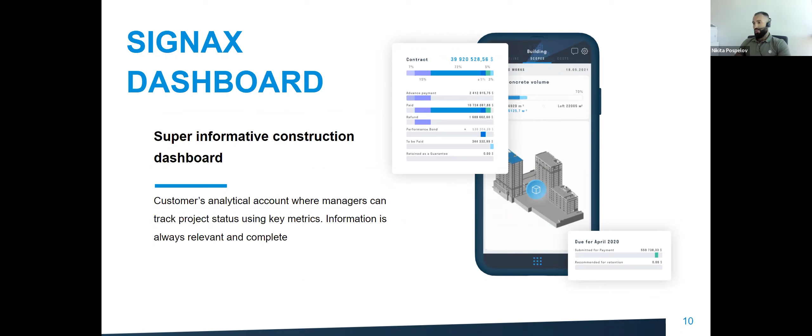This is a web-based reporting tool from on-site. This is a very informative construction dashboard for management level, engineers, and any stakeholders involved in the construction process. You can see actual, updated information about the project process, open any BIM models regarding the design stage or construction stage, and check all the numbers and metrics.

Anytime you can select one of the types of cards inside the report dashboard and, for example, compare planned and actual BIM models. You can see the percentage, the scope, and the schedule.

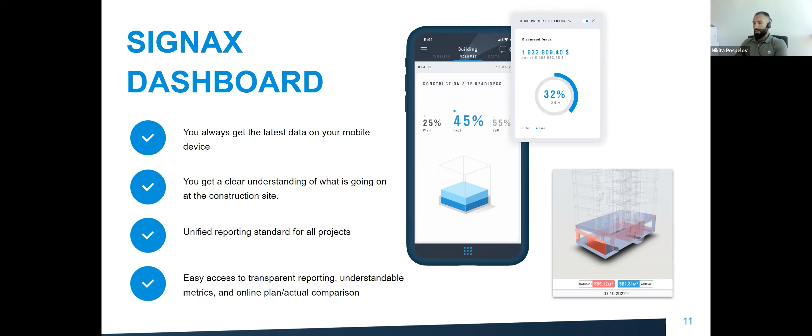The second module is inspection. This is a 360-degree service for images. You can open it using a web browser and see what was happening on a certain date on the construction site. You open a plan, select a point of interest on the plan, the image will upload, and you'll see what was happening on site.

One of the useful features, you can compare two photos and see the progress, the dynamics on site.

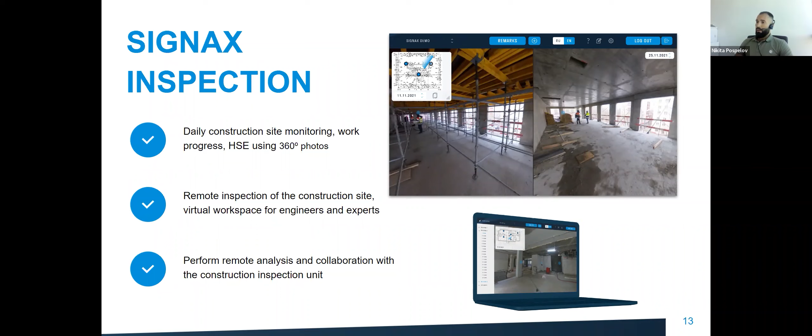We also developed our own application for 360-degree capturing. You can download it from Google Play or App Store. This is a very convenient way of capturing 360-degree photos using your mobile phone—just press one button and send all the photos to SIGNAX Inspection. Then all stakeholders will see updated photos in 360-degree mode inside a web browser.

One of the main features is automated design, BIM model elements classification, BIM model audit, and exporting tender scopes and bill of quantities, using just the BIM model in 2 steps.

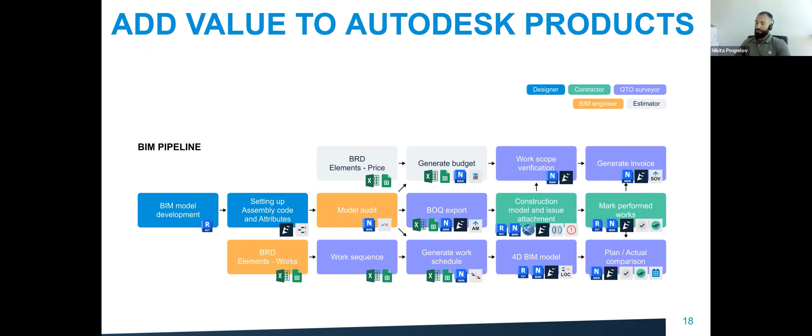So let me jump to the practical part. That was just the theoretical part and some images about the SIGNAX product. Let us jump to the SIGNAX dashboard report. Here you can see an example of developed reports inside SIGNAX. So you can create reports depending on the dates. You can create them on a daily, weekly, or monthly basis. It depends on the project rates, how fast work is implemented on site. So usually contractors create reports on a weekly basis.

This report is created with logical division by horizontal rows. The first horizontal row is project general info. We have lots of predefined cards inside our dashboard, so you can customize your reports on your demands. The first slide is just an album. You can open it and see the actual photos of the project. The next slide is main tech indices about the project, common area, height of the building, number of parking lots, number of apartments, etc.

The third one is the implementation period regarding the contract or agreements. 360-degree images, we'll see them later in SIGNAX inspection. Online CCTV cameras from on-site, so you can jump inside and see what is happening online on-site. Sorry for that. If the internet is slow in the field, you can anytime select low quality video and see what's happening on site in the field. Something like this.

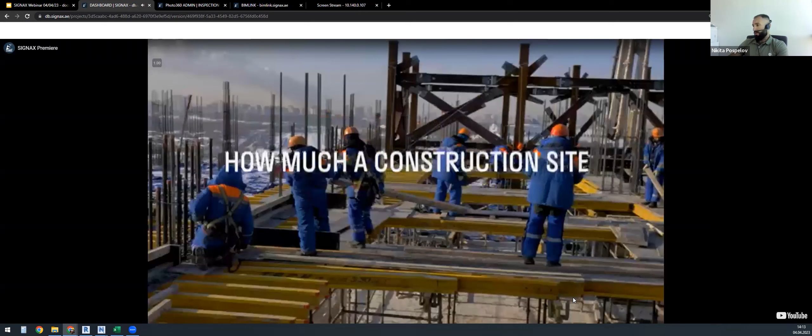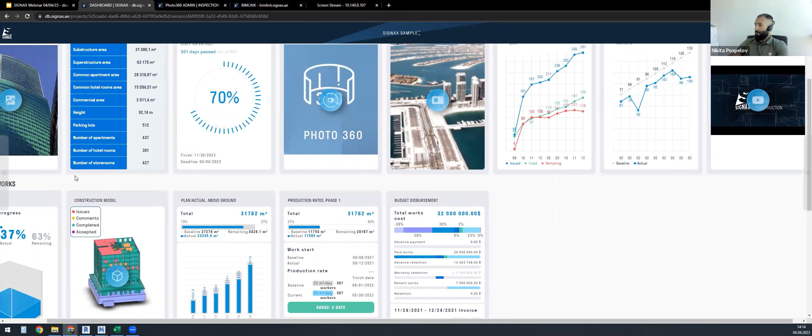So the next slide is workers trend. Workforce on site, how many personnel was planned, like a baseline, and how many actual personnel was on site on each date. Also, we have implemented YouTube clips. You can open them inside the SIGNAX dashboard. So usually you can add some commercial or, for example, an aerial drone overflight of the project and provide it for a customer or a client.

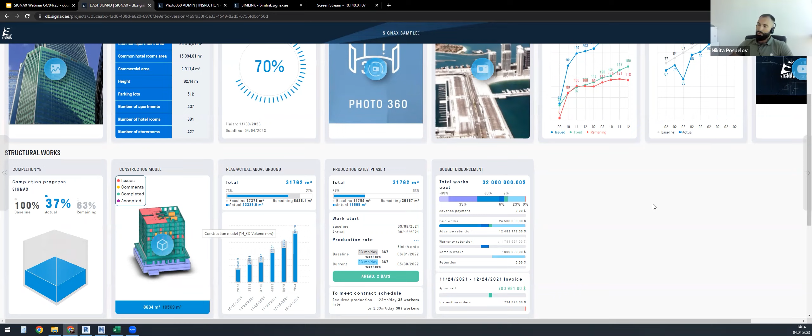So the next horizontal row is created regarding the structural works. You can see the overall percentage of work implemented and how many works remain. You can use SIGNAX tools and develop the construction model to provide the exact scope of works implemented on site. In minutes, I'll tell you about other cards in the dashboard regarding structural works. So plan actual information about the works that were planned, the gray line, and the blue line regarding the actual works. So anytime you can see the total works planned on site, the baseline, and the remaining works. You can jump inside and see the graph view, and you can change the view to another graph.

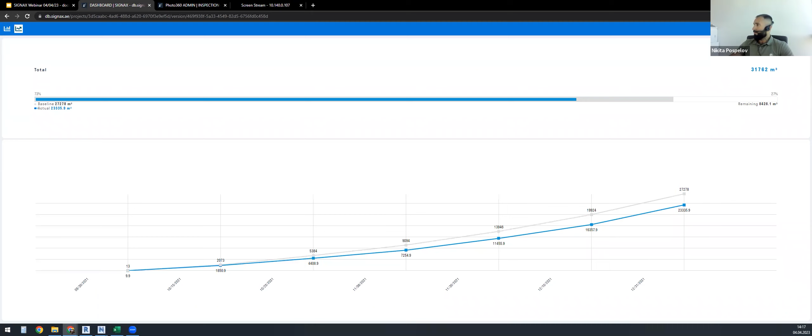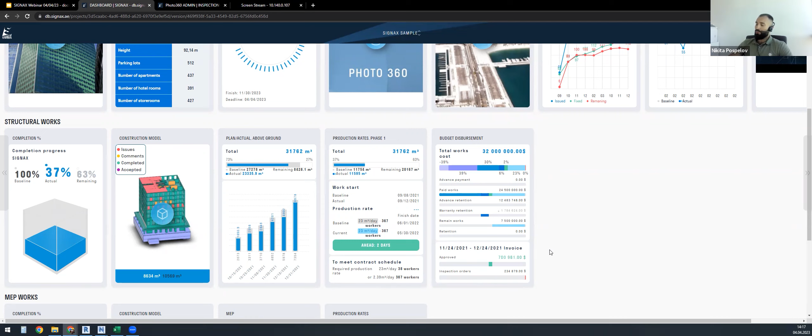Production rates, how much production rate was on a certain date, how many workers were involved in this type of work, and how many workers need to be on site to meet the contract schedule. Of course, we have some information inside the budget card, so you can see the overall budget, how many works were paid, and information about the current month's invoices that the contractor sent us for acceptance.

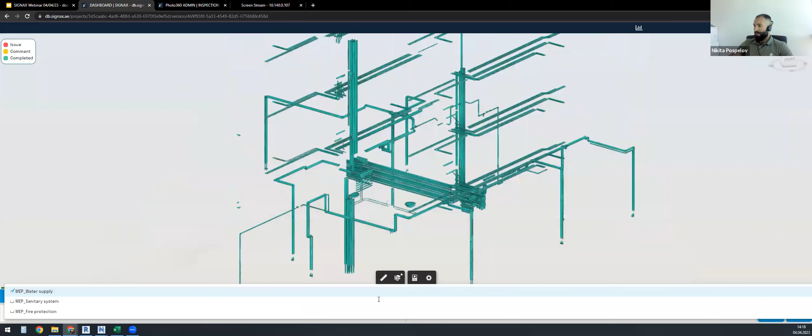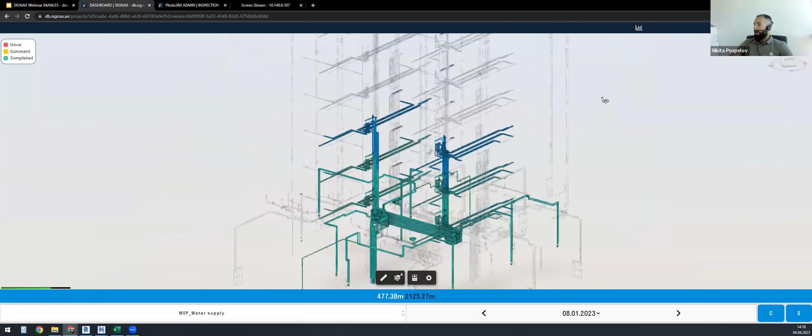And the third horizontal row is regarding the MEP works. Here you can see the construction BIM model that is developed based on the design model. So we can select, for example, the water supply system. See the blue elements selected. That's the volume that was implemented on site on the 8th of January. We can go back and see the exact scope on any date that was tracked using SIGNAX tools on site. In the 3D view, we can jump to graph view and track any of these dates and see the specific elements that were implemented on site, the overall scope and the scope of the specific date. And the same for the other types of works.

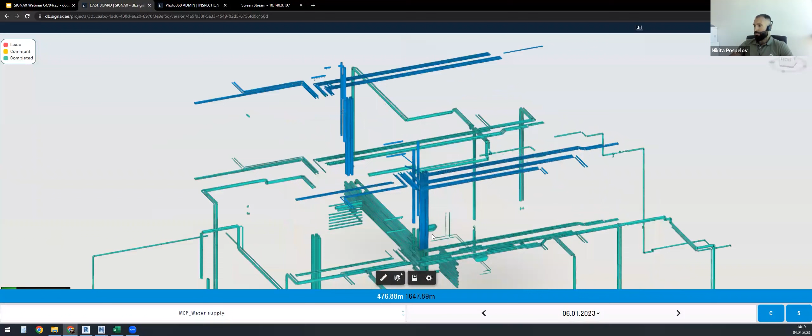As well, we implemented the feature for issue linking. So you can select any element and see what was wrong with this element. For example, here we can see the wrong pipe size. We can press this button and we will jump inside the ACC Docs system, CDE system, common data environment, and see the detailed information about the issue that was created inside the system. Same for other elements. For example, here we can see check for the leaks.

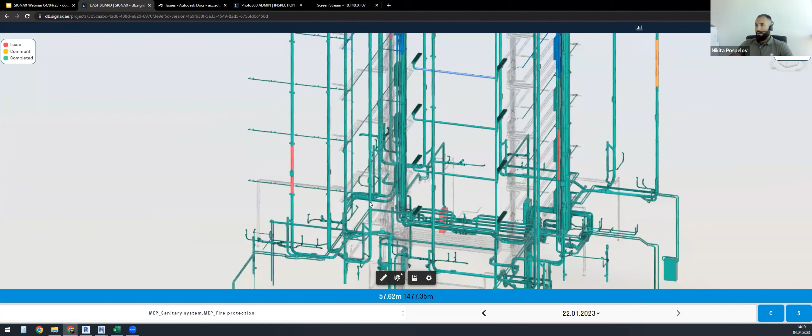Let us go back to structural works construction model. So the same, I'm selecting work type and see what was happening on a certain date with the scope on the certain date. As well, we can jump inside the graph view. And for example, we have some suspicious peaks here. We can select this date and go back to 3D view and see what elements were implemented on site and what's the accurate scope of these elements.

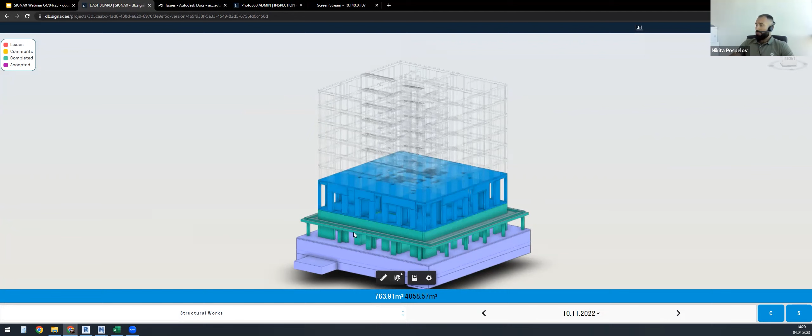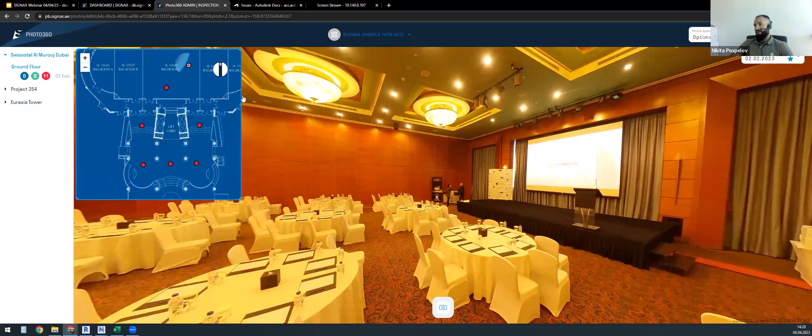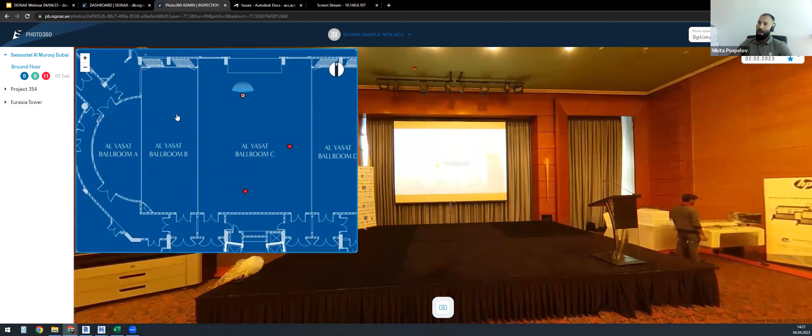So this is SIGNAX dashboard report, construction models tracked during the construction phase, and online CCTV cameras and images from on-site. So let us go next to the second module, SIGNAX inspection, 360-degree images from on-site. So here you can see one of the projects. We upload plans regarding each project, create points of interest, and the personnel who is responsible for creating on-site pictures, just using Photo360 application for iOS or Android, are creating photos on site.

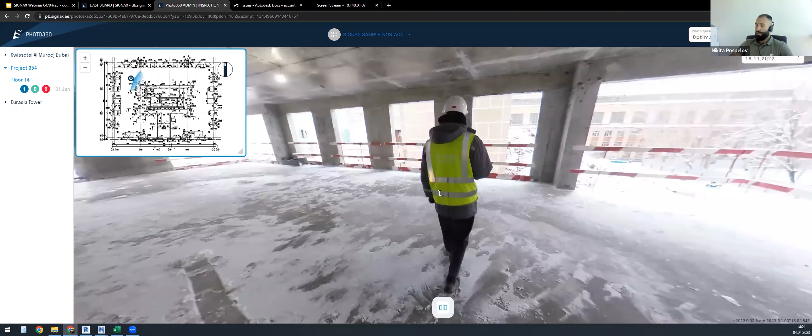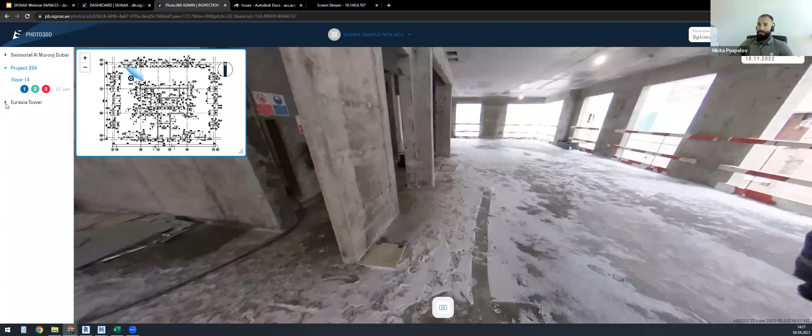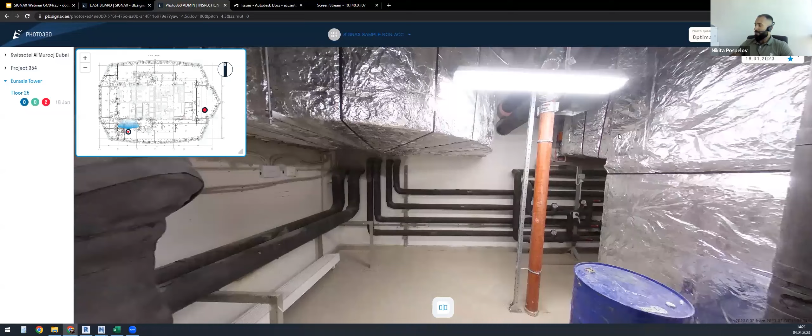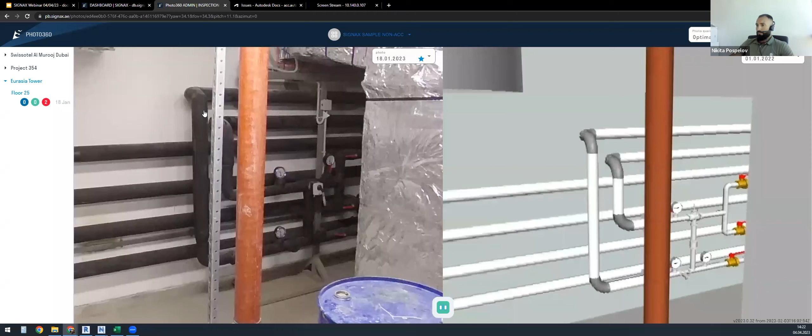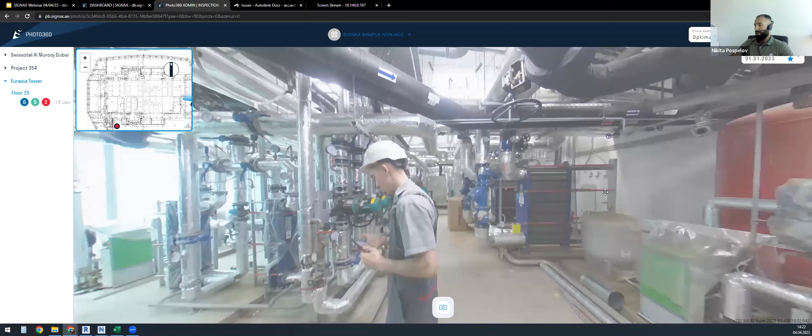So let's go next to the second point and compare it with the design stage. Right now, we're developing more features for this module, SIGNAX inspection. So you can add any comments, issues, and track the progress and collaborate with other stakeholders.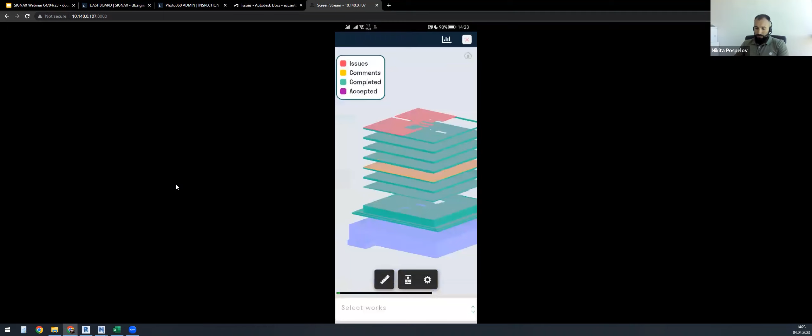Let me show you how it looks from the mobile device. So regarding the dashboard application, you will see all the same cards. See the information inside your pocket. The same, you can open the BIM model inside your smartphone, select the works, and see the exact scope of the elements that were implemented on site.

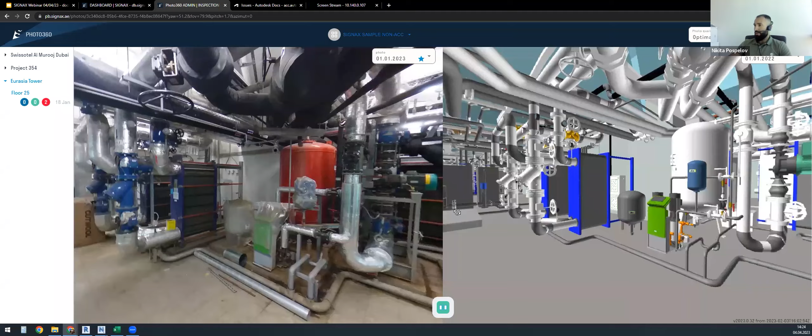Let us go next to the third and last module, SIGNAX tools. I'll tell you briefly how you can work with BIM models using SIGNAX tools. Right now, I'm showing the structural model of the design stage. One of the good and useful features is SIGNAX Checker. So you can provide the audit of the BIM model that we received from the designer. For example, we want to check if the assembly code is inside each element of the BIM model.

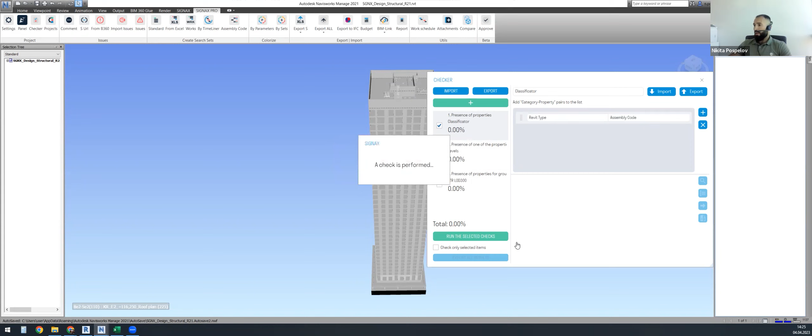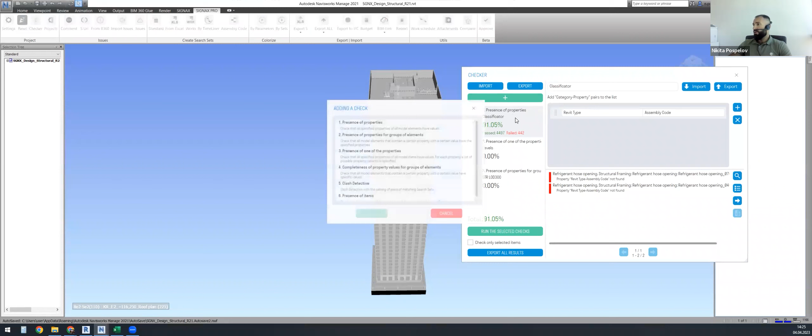So I'm specifying the name of the property, then click the button Run Selected Checks, and SIGNAX tools will check all the elements inside the BIM model, and we'll get the result which elements passed the check and which of them failed. So we have lots of predefined checks, so you can customize your checks and audits based on the design model for presence of properties, group of elements, presence of one of the properties, clash detective, and presence of items.

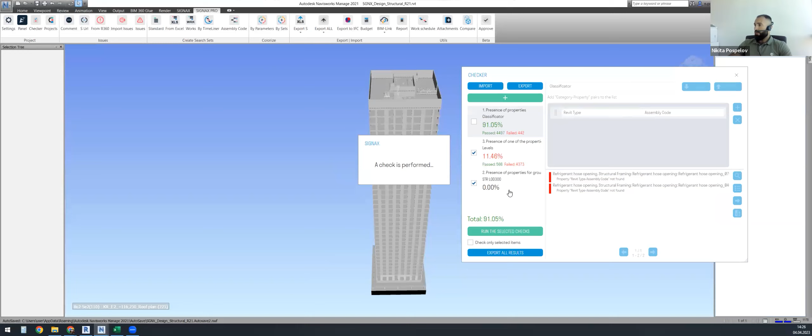So if you're interested in our SIGNAX checker, you can contact any of us, and we will tell you in detail how it works. The same, you can run two other checks, presence of one of the properties inside the BIM model, and see the status of the design model. Anytime we can export this information to an Excel document and send this check to the designer, or for example to a consultant. So this is one of the features that you can use on the design stage.

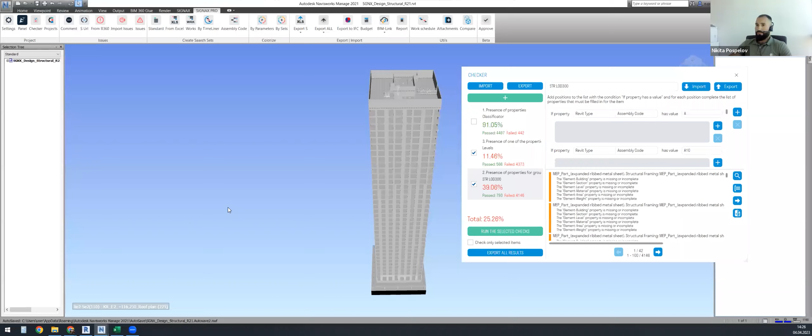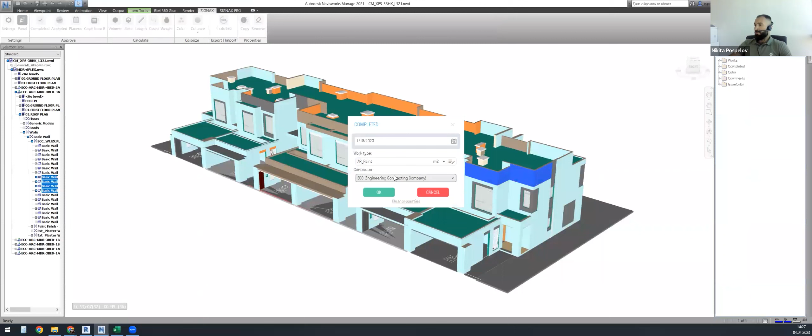Let me go to the construction stage using Navisworks. So when we track progress on site, we are using SIGNAX tools and Navisworks. It's pretty easy to do. You can select one of the elements and say that they are completed or accepted. Press this button, select the date of implementation on site, select the work type, for example, paint, select the contractor name. Okay, that's it. That's all of the process of tracking the progress on site. All information is saved inside the search sets.

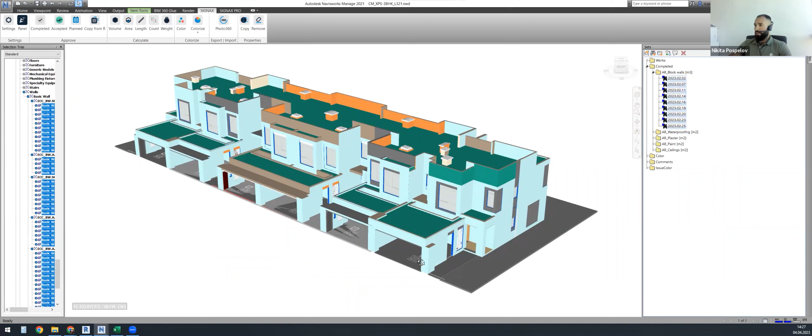So here you can see on the right side the dates that certain elements were implemented. For example, we are interested in what was the scope in February. I'm selecting all of these dates and hiding all other elements. Here we can see only the specific elements I just selected. And just in 2 clicks, we can get the volume of these elements, 261 cubic meters, and the area, 1700 square meters.

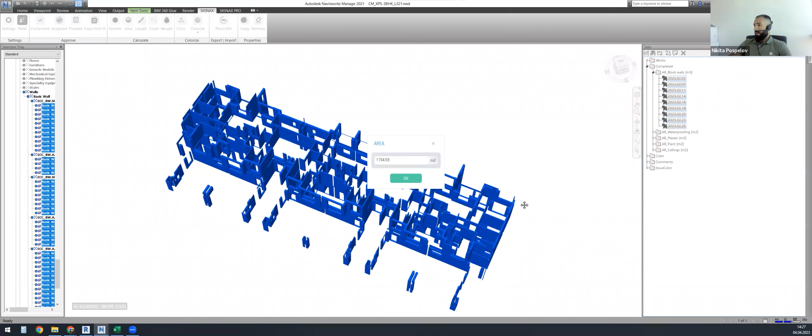And if we would like to export this information like an invoice, we can export this data regarding any type of work. For example, I'll press export. Sorry, this. Yep. Export invoice. Completed works. Selecting the project. Selecting work types. For example, I'm interested in all of them: ceiling, block walls, plaster, paint, waterproofing. Selecting the start date and the finish date. Okay.

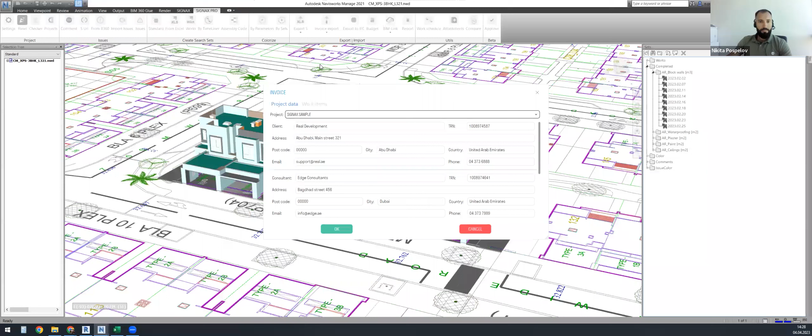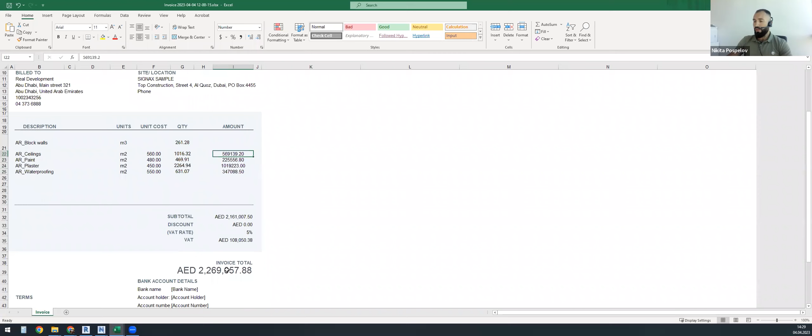So the invoice. So right here, I've just exported the invoice. Here you can see the quantity from the BIM model, unit cost that we specified inside SIGNAX tools, and the overall amount and the sum. So this is the complete document you can provide for a consultant for acceptance.

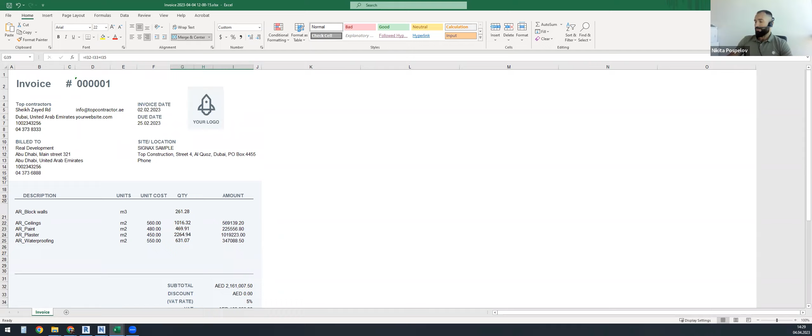So this is one of the features you can use on the construction stage. Let me tell one of the good features, BIM-Link. So this is used for providing information using the BIM model for the stakeholders that do not have additional software, for example, Navisworks, Revit, AutoCAD, etc. So you can press BIM-Link feature, select the works you can share with the stakeholder, for example, planned works or completed works, and upload it to the cloud.

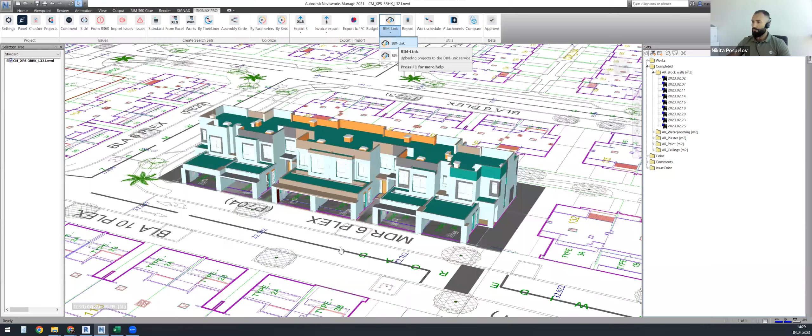So after that, we will have the direct link. So you can share this link with the stakeholders. Let me open it. 1 second. Copy link.

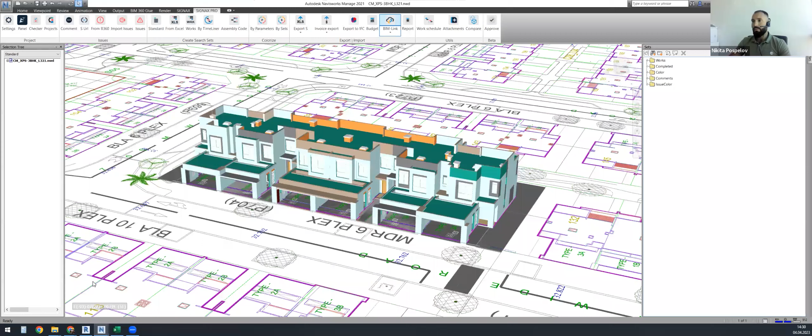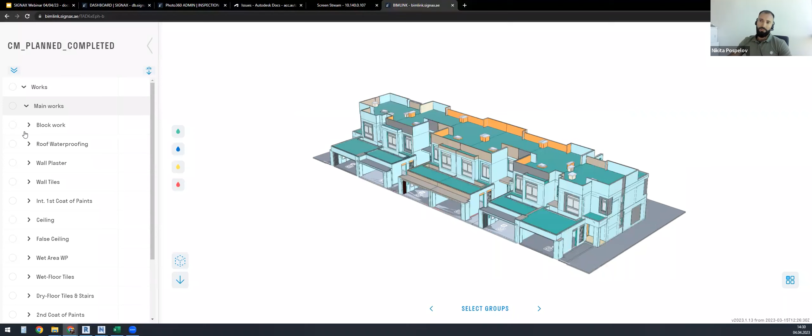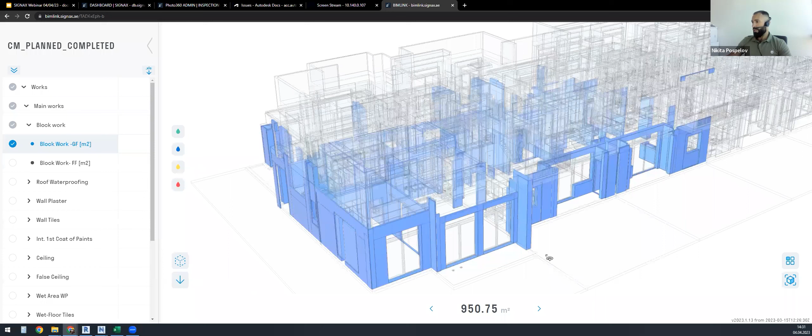So the stakeholder can open this BIM model inside web browser using his smartphone, iPad, or just a laptop. Select, for example, planned works. He is interested, for example, in block works on the ground floor. See the certain elements that are planned for implementation on site. See this exact scope, 950 square meters. And you can do the same for any type of work, for example, plaster, wall tiles, any type of works that is inside the design model.

And regarding the construction model, for example, we want to know which works were completed on a certain date. Selecting this date and see the certain scope, exact scope, and the elements that are implemented on site.

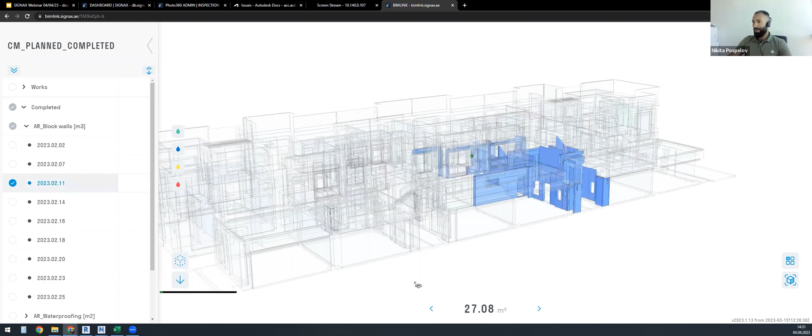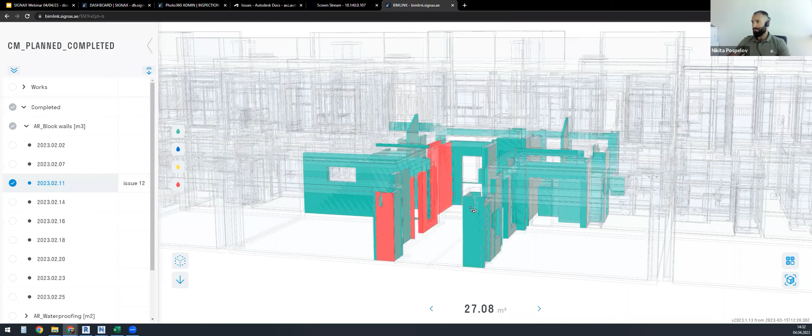For example, we are working from a site or from a supervisor, and we want to add some additional information regarding the works implemented on site. So we can select one of the elements or number of the elements, for example, these walls, mark them as an issue, and add additional information. Issue something 1, 2, 3. And we can share this information with other stakeholders, just sending this link to them. So it's like a digital notepad in 3D view without need of any additional software installation. All this information you can export as the Excel file and open it with the classic software.

So here you can see the exact scopes regarding each part which was implemented on site, because usually the big elements on site are not implemented in one element, they are done in parts. And we want to calculate the scope, not as an approximate percentage, but we want to know the exact scope that was done on site. For that situation, we're using Revit, and anytime you can mark elements as completed, accepted, or planned works based on the design model.

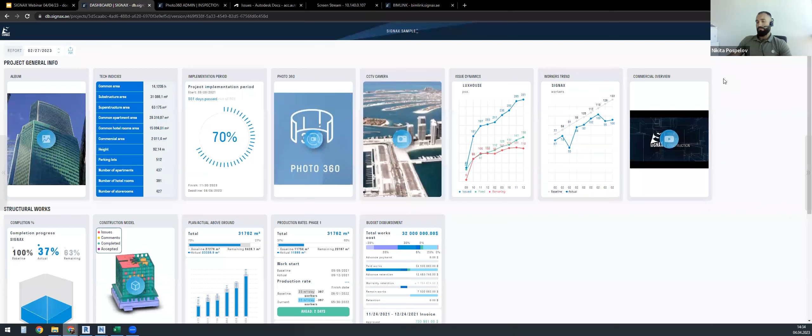Yeah, I see Antonio is asking a question. Can you unmute? Hello, good afternoon. Can you hear me perfectly? Yeah, Antonio, hello. Okay, good. I'm Antonio from Strabag. I'm sorry to join you late. I had another appointment in between and I came, I think, 10, 15 minutes late, so I hope not to have lost a lot.

I checked that what you were showing us is basically focused on building construction, correct? What about infrastructures like road construction, dams, or airports? Airports, we can use it for the building part, but for the runways, for all the other parts like illumination from the taxiway, runway, etc., is it possible to use? Do you have some samples to show me quickly?

Yeah, I understand your question. Actually, our product can be used on any type of projects, MEP projects, line projects, structural infrastructure. Right now, excuse me, I could not show you some examples regarding them, but later I can prepare some information for you and send you details and examples of infrastructure projects. We had an experience building one of the factories, and the factory was in the mining industry. So they had multiple buildings around a big area, and they connected them using lots of MEP systems, pipelines. So we tracked all this progress using SIGNAX tools.